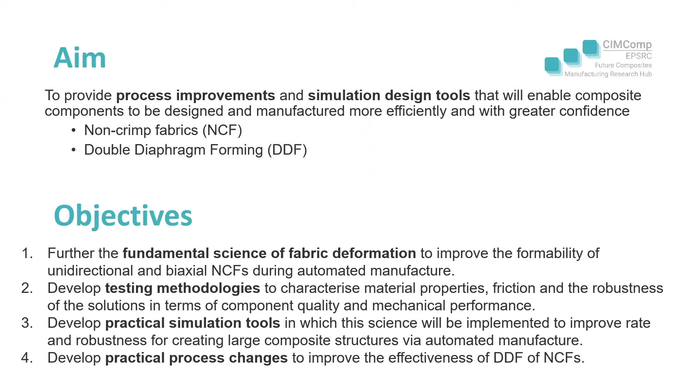The third is to develop practical simulation tools that can be readily adopted by our industrial partners so they can implement them to improve rate and robustness. And the fourth is to develop practical process changes, again, that can be easily implemented at an industrial level for both double diaphragm forming and non-crimp fabrics.

The work at Cambridge is looking at developing a component geometry designer. Again, this is a tool that will hopefully be adopted by designers to bring them closer to the manufacturing space so that they can ensure that designs are produced so that they're fit for manufacture. And this is based on a machine learning approach using the output from finite element simulations. So this is a multi-parameter remodeling tool that relies on machine learning to train an algorithm to detect the location of defects to facilitate the rapid redesign of tooling where required.

And then the third element of the project is at Nottingham looking at more detailed finite element analysis for defect prediction. And the objective here really is to focus on large structures, sort of 10 meters plus, so that we're able to detect small scale defects in the order of millimeters over that large length scale.

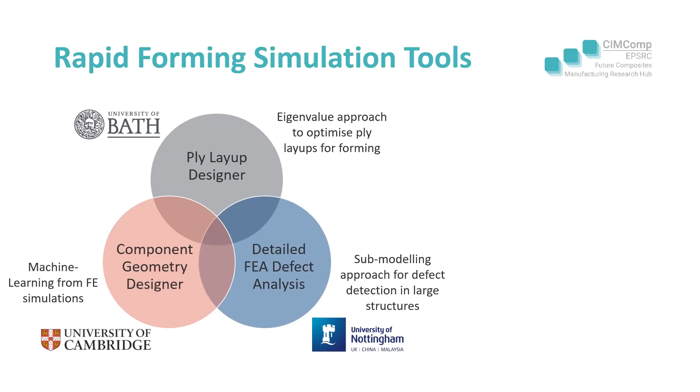So we're working with a group of industrial partners, so Dassault Systèmes, Hexcel Fabrics, Reinforcements in Leicester, GKN Aerospace and Gordon Murray Design. And the aim is to provide a range of process developments to improve the robustness of the double diaphragm forming process, whilst looking at locally tailoring fiber architectures to achieve a step change in formability.

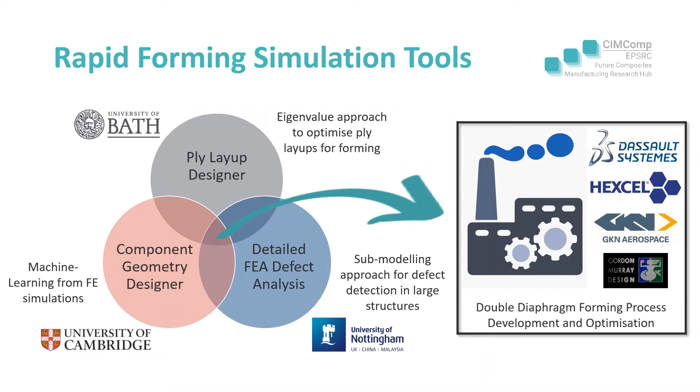So if we have a look, first of all, at the component geometry designer, this is the ongoing work at Cambridge, and this builds upon a feasibility study that was funded by the Hub at Cambridge around 18 months ago. And that work was concerned with developing methods for evaluating wrinkles within preforms. And Michael and the group at Cambridge developed a digital image correlation approach for measuring the amplitude of wrinkles, and they produced a nice forming rig towards developing a forming limit diagram for these materials.

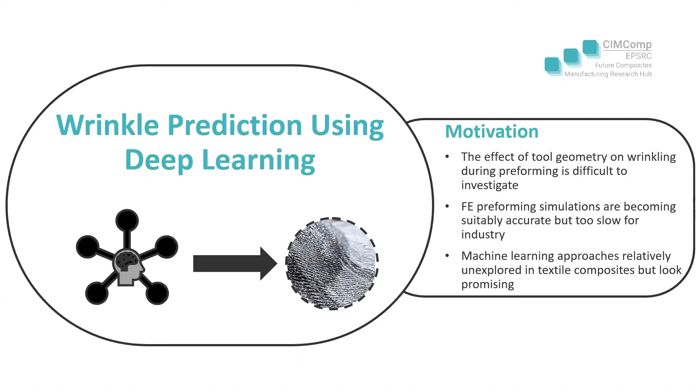So the idea is now that we use this convolutional neural network as a means of applying machine learning to try and understand why defects occur as a result of features within the tool geometry. So on the left-hand side, you'll see this geometry generation algorithm, which is based on a series of polygons. And Werner, the PhD student, has developed this so that we can generate quite a diverse range of geometries that can be evaluated using the sort of simplified finite element approach that we've been working on at Nottingham, and other codes that are available within the community.

So each one of these geometries will be evaluated for wrinkle patterns, looking at possibly the strain distribution in the fabric and looking at overshearing and wrinkles that occur, and then they will be analyzed using an image analysis technique, and that information will be then fed into this deep learning model. And the idea is that that deep learning model will then be applied to a number of unseen geometries to try and predict the wrinkling patterns, and this can then be validated using the double diaphragm forming facility at the University of Nottingham.

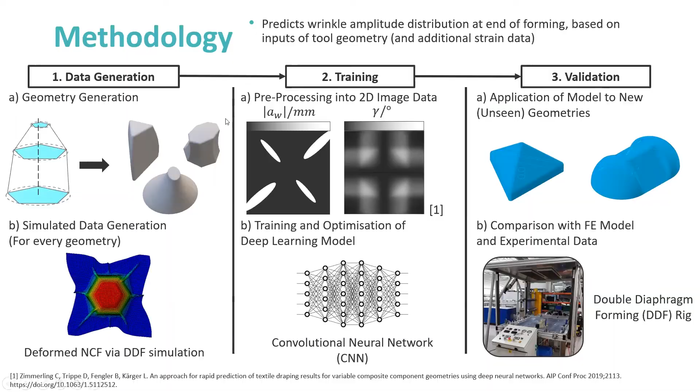Moving on to look at the more detailed FE analysis, this is building upon work at Nottingham. So some years ago, we had a project looking at developing a simplified finite element model using a membrane approach. More recently, we've been trying to incorporate the bending effects of the fabric plies.

So what we're using is this composite layup module within Abaqus, where we can define a single ply using this laminated approach. The yellow region you see on the left-hand side represents the in-plane stiffness of the material, and then the grey outer regions represent the bending behavior, and we can therefore decouple the in-plane and the out-of-plane responses to account for the different stiffnesses.

And in addition to developing the model, we've modified the existing method for characterizing the bending behavior of these fabrics so that we can capture the nonlinear behavior, and that's shown on the right hand side. You can see if we compare the two model outputs on the left with the experimental data on the right, the nonlinear bending behavior gives a much closer response to reality in terms of the wrinkle pattern.

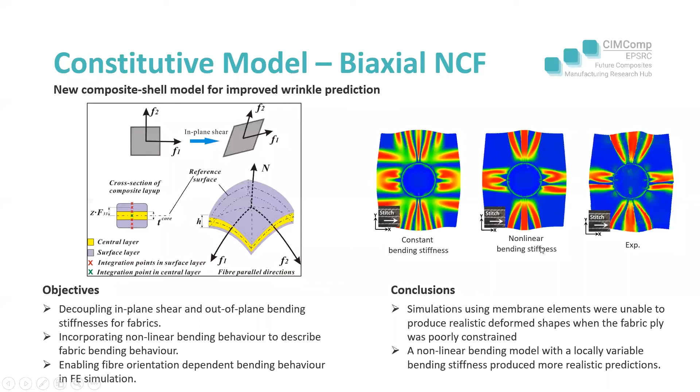So what we want to be able to do is use this more sophisticated, detailed model to predict the location of wrinkles, but it isn't really practical to do that over large length scales because of the computational resource required. So we've looked at using this global to local modeling approach, whereby we can model small regions in great detail, but initially we do this global model using the lower order membrane approach to identify where the critical regions are.

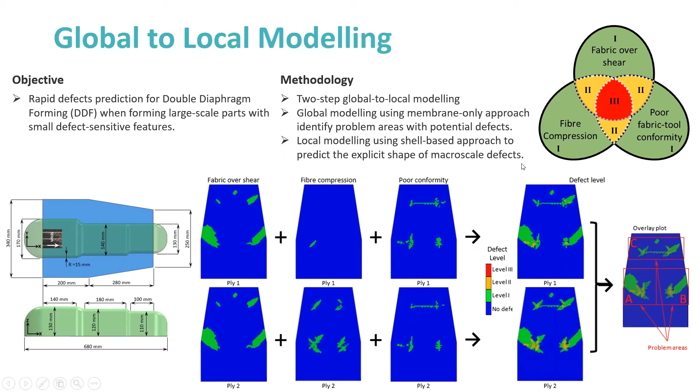So in the center here, you see these plots. The left-hand column is the response of the fabric showing areas of overshearing. The central column shows areas where the fibers are in compression along the fiber length, which will lead to buckling and out of plane wrinkling. And then the third column shows areas of fabric bridging where it hasn't conformed well to the tool. So when those three are superimposed, we get this defect plot on the right-hand side, and we can use that information then to identify these sub-regions where we can apply the more detailed model.

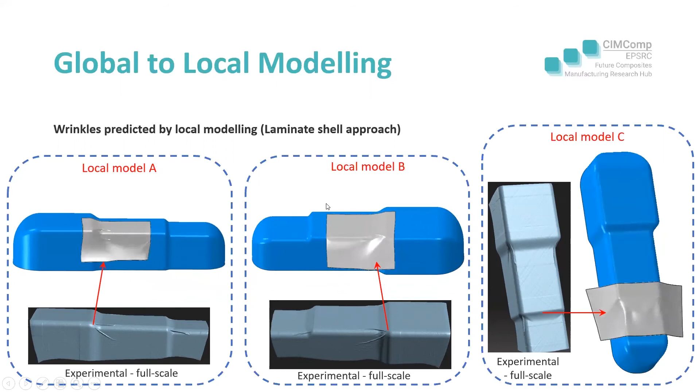And to confirm this, we've actually done some experiments using the same size and shape piece of fabric as in the submodel to demonstrate the importance of the correct boundary conditions. And we get a very different response if we form a small piece of fabric such as this, because we don't get the same draw-in that we would get from a much larger piece of fabric.

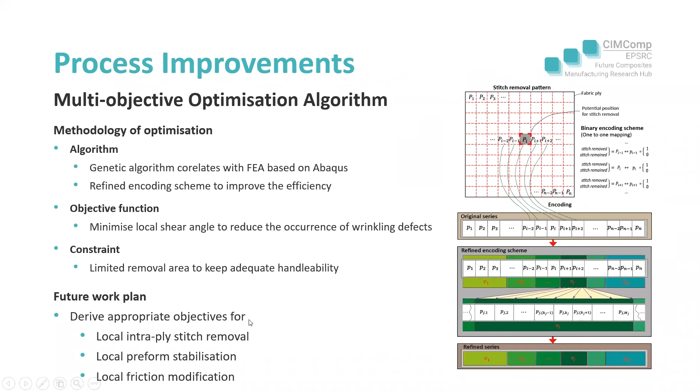So the idea is that we have this toolbox and we want to then apply these tools to make local and global process improvements. So Shuai Chen is working on this multi-objective optimization algorithm using genetic algorithms, and the idea is we can then intelligently modify the preform and the process to hopefully reduce or mitigate against these defects. So the things we're looking at are intraply stitch removal. You can see here the red regions indicate where the stitches have been removed, and this has a positive influence on the wrinkle patterns of these preforms.

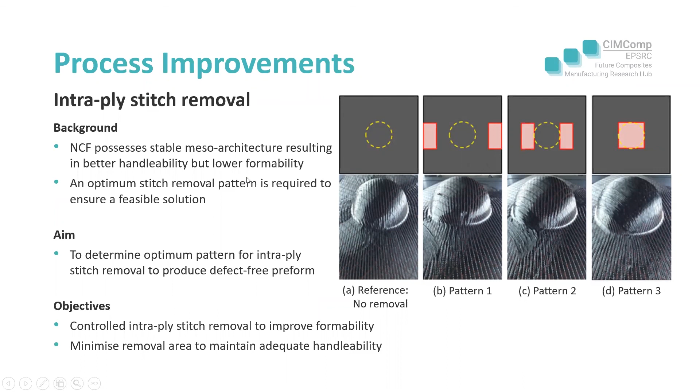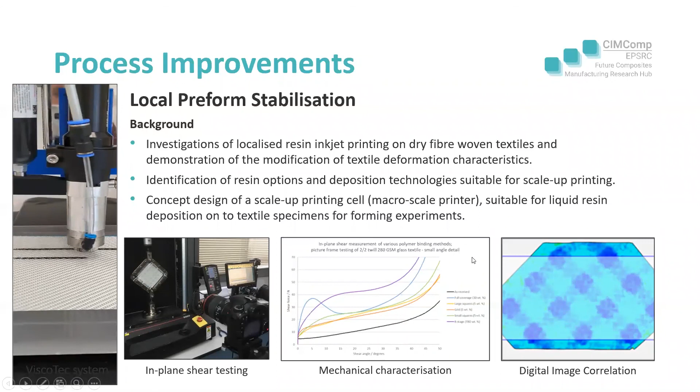The idea is by using that genetic algorithm, we can then intelligently modify the stitch pattern to get a good balance between mechanical performance, formability, and handleability of the ply. Similarly, we've looked at local deposition of resin to try and change the local shear stiffness of the fabric, and this will then be driven also by that genetic algorithm. And the resin can also be used to locally bind plies together.

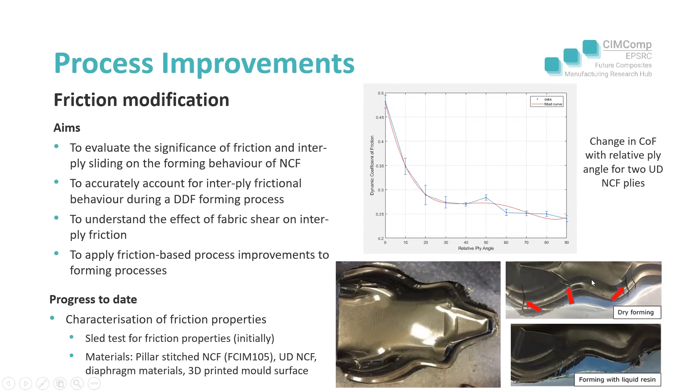And then finally, we've been looking at the influence of interply friction, whereby adding lubricants and other materials between the plies, we can influence the coefficient of friction, and this has a positive effect on the wrinkle behavior of the ply. So this seat mold here, for example, at the top, you can see there are quite severe wrinkles around the perimeter, but when the fabric has been lubricated, those wrinkles disappear.